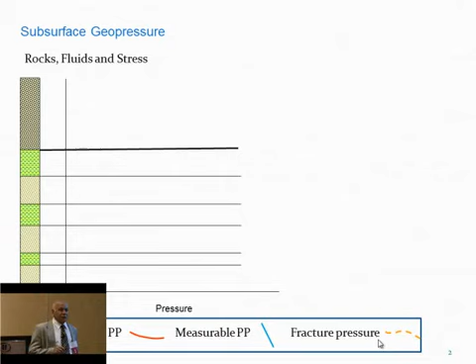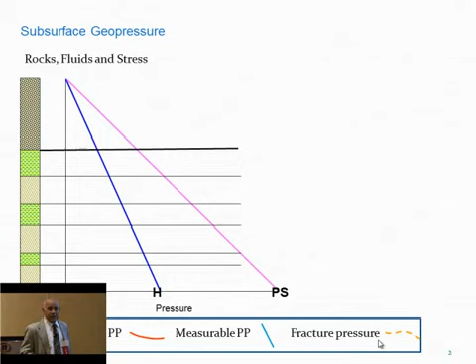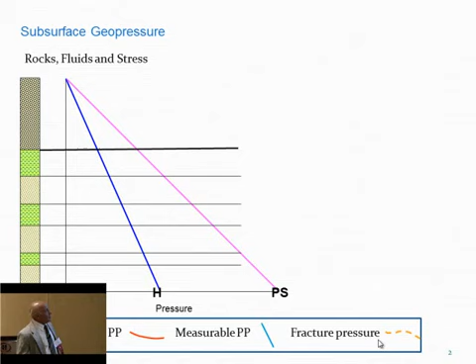Here is the lithology, the rocks - sand, shale, sand, shale. To build up the pore pressure in the subsurface, we need rocks, fluid, and stress. Here's the rocks, here's the fluids, the formation fluids, and here's the stress. The stress will build up the pore pressure in the subsurface, exactly like human beings - stress builds the blood pressure up. Between the hydrostatic and the principal stress is the pore pressure.

Any pore pressure profile should be displayed in two parts: the part predicted in the shale, and the part that's measurable - the one you can measure is in the sand. You see how the pore pressure profile progressed from top to bottom. If the pore pressure reaches a point where it exceeds the limit and starts fracking the formation, this is the frac pressure. So we have the lithology, hydrostatic, pore pressure in the shale, pore pressure in the sand, the frac pressure, and the principal stress. That's what you're going to see in the next 25 slides, so remember this term.

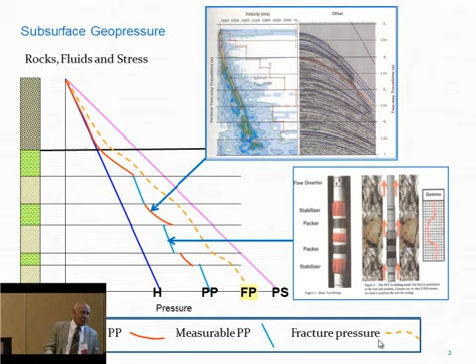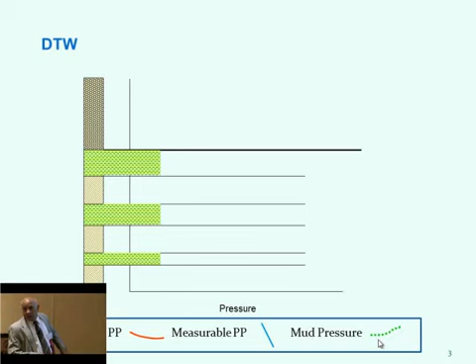Here is what I refer to as the drilling tolerance window - I'm going to call it the window from now because I can't say drilling tolerance window all the time. Here's the lithology, hydrostatic, pore pressure, frac pressure. This window between the pore pressure and the frac pressure is very important. This window dictates how deep you can go, what your mud program looks like, and how many casing points you need to drill to reach your objective.

So we use the mud to drill anywhere, right? The function of the mud, earlier we used to say, is just to remove the cutting and lubricate the drill bit. But the mud has a very essential function: to keep the sand bed from flowing into the borehole and to keep the shale bed from breaking out. What do you call it? The borehole integrity.

You cannot use mud weight very close to the frac pressure, and here comes the safety issue, the safety limits. So we're getting a little complicated here. You got the pore pressure, you got the frac pressure, you got the mud weight in between, and you have a safety limit. So it's getting a little bit complicated.

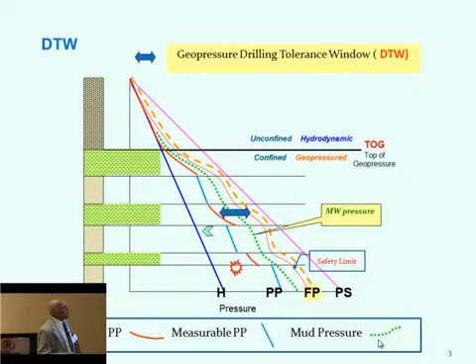We're taking the mud line 7,000 feet down, and let's see what happened to the principal stress. That principal stress, or the rocks, is going to move down 7,000 feet. Therefore, your principal stress moved 7,000 feet, your pore pressure moved down 7,000 feet, and of course the top of the geopressure, and your frac pressure follows suit.

Look at the difference between this window and this window. In the deep water, the window here is relatively narrow, maybe 30 or 40% narrower compared to the shallow water. Therefore, you need 3 casing points here to reach your objective at 20,000 feet, and here you need 4 casing points to reach your objective. That's the difference.

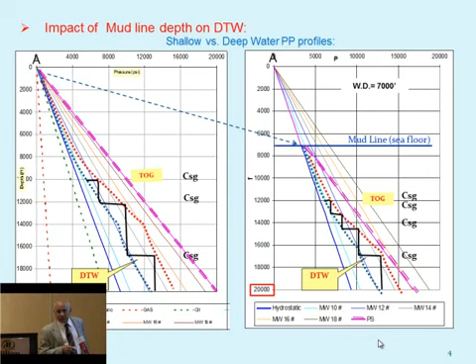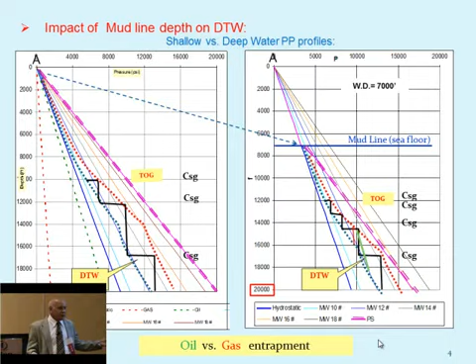Also, have you noticed nowadays in the deep water they found more oil than gas? All the new discoveries in the deep water, you see a lot of oil. The reason is, if you look at the gas and oil gradient here, and we superimpose that gradient on the deep water profile, you can see you can trap more oil than gas because the gas has a low gradient, because this is a narrow window here. If on the shelf, we can trap both of them without any problem.

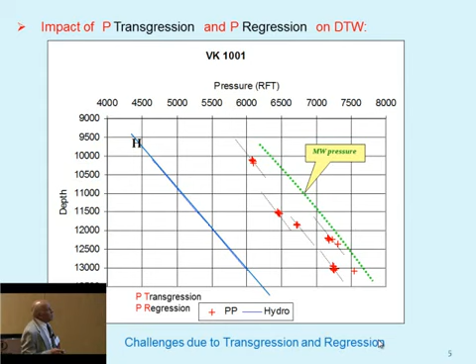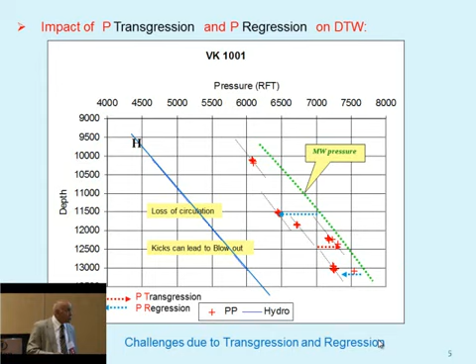What is the reason for that? A lot of people have a lot of guessing, or examples, here. The mud pressure here, we're going to assume this is the mud pressure to drill that well. When you have a transgression here, you might have a kick that can lead to a blowout. On the other hand, when you have a regression, you can lose circulation. This is one of the problems of transgression and regression, and transgression and regression are mainly due to structural impact.

This is a well that's been drilled in offshore Texas about 9 years ago. From the velocity, the seismic velocity, this is what the pore pressure looks like. And also from the seismic, we calculate the overburden, or the principal stress. In between, we have the frac pressure. We have the coefficient for it, and we did it.

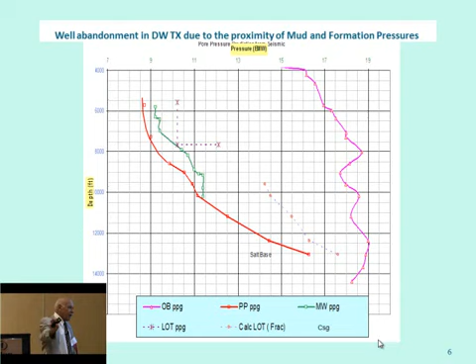So they drilled this well up to here. This is the mud weight. Here is 2 leak-off tests. The leak-off test means frac pressure; you measure the frac pressure in that formation. Based on the frac pressure up here, we calibrate the frac pressure way ahead of the drill bit. So the calibration was good.

So the mud weight is supposed to follow the pore pressure down there. But unfortunately, the tool pusher, and probably the people dictating how this is going to proceed to reach this point, the next casing point, let the mud weight go straight. It didn't change. It doesn't follow the pore pressure.

What happened? There's a very small streak of sand, about 10 feet, and the well started flowing. They killed the well, and the formation broke down. This is a cycle that's very common in the deep water.

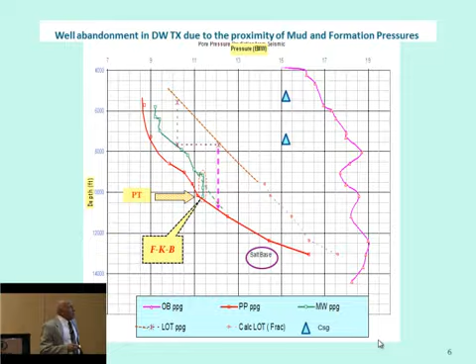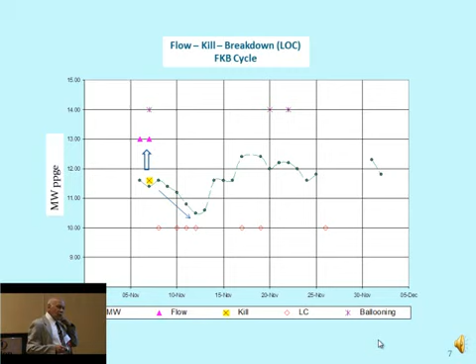Flow, kill, and break down. This cycle took about a month to try to heal or fix that well. It didn't work out because with the well flowing and you kill it, you start losing circulation from increasing the mud weight, so you reduce your mud weight, then go up again and try to drill, raising the mud weight. This is like an endless cycle. After a month, to pass just 5 feet of sand, the well was plugged and abandoned, not dry and abandoned.

Let's see how, if you have a discovery, a gas column or hydrocarbon column, this is going to impact your window.

This is Mississippi Canyon Block 296, south of the Macondo Prospect. Everybody can see? All right, look at that pore pressure profile here.

This is the mud weight, an indication of pore pressure. Here is the RFT, measured pore pressure. Here is the leak-off test. Look how narrow this window is. You cannot maneuver, it's pretty tight. It took about 7 casing points to drill 10,000 feet, so every 1,400 feet you're going to stop at a casing point because of that narrow window.

Let's take this piece and enlarge it. Here is your water-gas contact, here is a gas column, here is the mud, here is the leak-off test. That's the frac pressure, and that's the window. The window without the gas would extend up to here, but because of the gas column, your window shrunk. When the window shrank, the ability to maneuver with the mud weight became very restricted. So that's one of the problems.

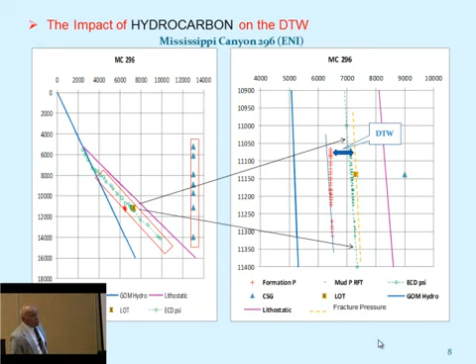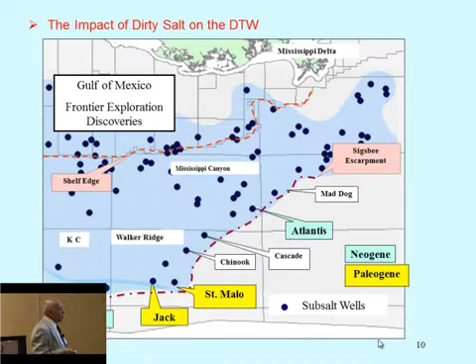Your principal stress is going to equal the tectonic force, so it's coming sideways, and your overburden becomes the minimum stress. So if you frac your pressure, or run a leak-off test, the frac pressure is going to be almost equivalent to the overburden. You see that a lot. Let me share some examples. Okay, here's the model, the geopressure model.

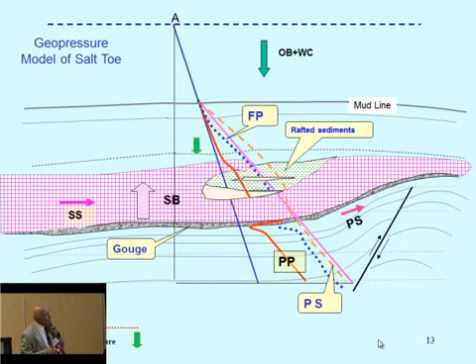There are two wells, one in St. Malo, and this is Jack 1 and Jack 2. This is St. Malo. They were drilled by Chevron.

Can you see? All right. Okay, I'm uncomfortable looking at it this way. I want to, huh? Can I come here? Sit down? Think so? All right, so here's two wells.

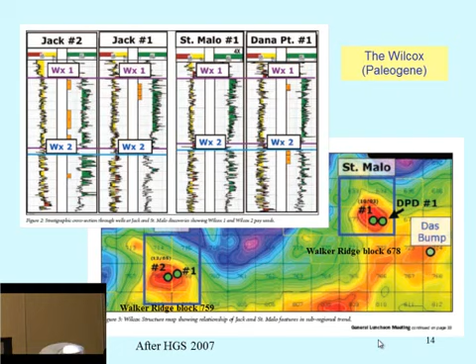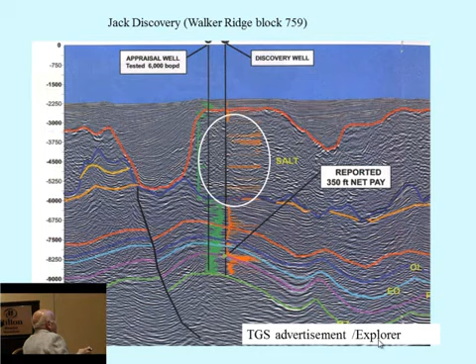One is Jack, one is St. Malo. And here's what that looks like on the seismic line. If you look at the seismic line here, you see a little bit of streaks. This is the overlay of the well log on the seismic here. Very high resistivity in some pockets here.

Okay, what happened to Jack? Mr. Jack here is the overburden. This is calculated from the weight of the sediment, just density, right? And I'm going to use the mud weight as a pore pressure indicator. Here it is. Then here's the leak-off tests.

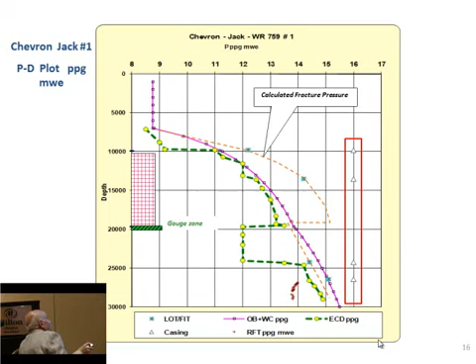You notice here when I said, okay, the frac pressure is almost or above the overburden. Here's the frac pressure outside the overburden, above the salt. Below the salt it comes back. Here's the calculated frac pressure, and look at this. Here's your pore pressure, or the mud you drill the well with. Here is the frac pressure. They meet at that point in the gouge zone where the salt plowed the sea floor.

And why is that? Because it was a dirty salt. The clean salt is supposed to have no pressure because it's solid. It doesn't have permeability, it doesn't have porosity, it doesn't have fluid. But here, you see the pore pressure increase. This is due to the inclusions of dirty salt.

Also, here are the RFTs, and this is a little bit of a calibration problem here. You see that? Turn it off. You see that RFT? Usually we have a problem when we convert RFT from PSI to PPG, giving you a reverse inclination or trend.

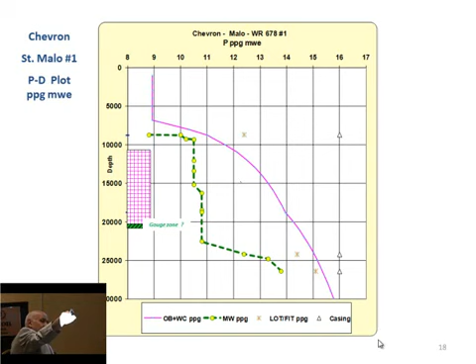On the other hand, next to Jack, about 10 miles away, there's St. Malo. Here is the overburden, here is the frac pressure, as usual. The frac pressure here is higher, below the salt is lower, and here is the mud weight, which I use as a pore pressure profile. Over here, went from the top of the salt to the bottom, through the gouge zone without a hitch. Went straight, no problem.

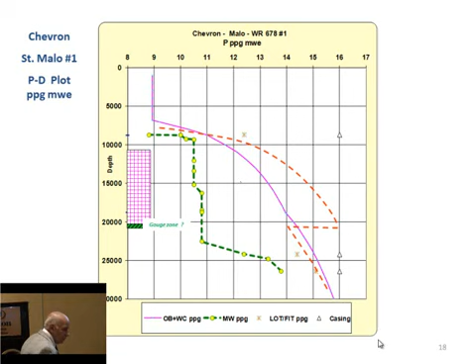Why? Because the window, the drilling window, was wide. I mean, the driller can play around, he can increase the mud, he can decrease the mud, there's no problem. Because it was clean salt, no salt inclusion, no rafting blocks. And need about 3 casing points to reach the objectives.

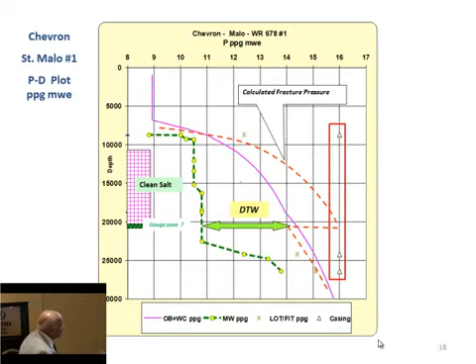So now we have two wells, Jack and St. Malo. One had a very, very narrow window, the other a wide window. The reason is this one was drilled in dirty salt, and this one was drilled in clean salt.

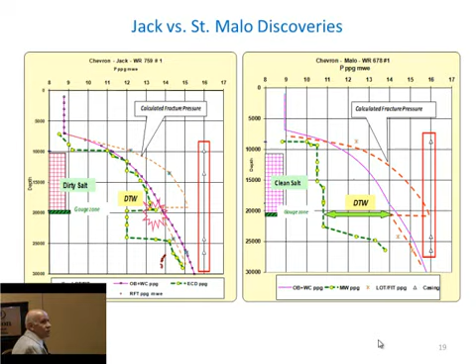We have another example also, repeating the same case, or the same thing. Atlantis, that was drilled about 12 years ago. Here's the overburden, calculated from the density log.

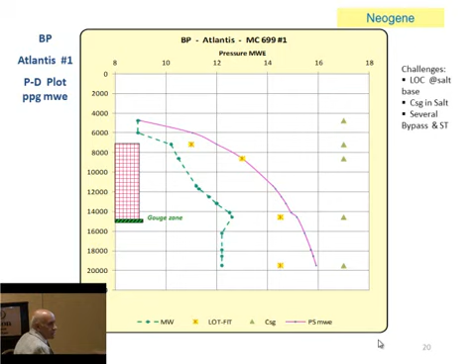Here is your mud pressure, representing the overburden and the pore pressure. You see here the pore pressure increased while drilling through the salt. You're not supposed to. They lost circulation in the salt, then they put casing in the salt. You're not supposed to case in the salt if you don't have any problem, right?

The frac pressure goes up above the overburden, then comes back in the gouge zone or the plow zone and becomes less than the overburden. Look at the drilling tolerance window, it's very narrow, and they suffer a lot of troubles, the flow, kill, and breakdown cycle I mentioned before, because it was a dirty salt. So the dirty salt applied to troublesome drilling. If you have a dirty salt, you get a lot of troubles.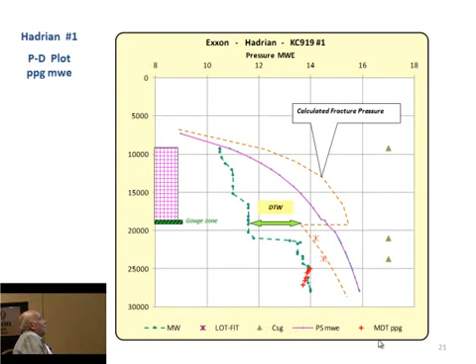Here is Exxon. About three months ago, they announced their discovery of Hadrian, Keathley Canyon 919 #1, and I plot everything here. This is the mud weight, representing pore pressure. Here is the frac pressure below the salt. We assume that frac pressure above the salt is going to be above the overburden, and below the salt is going to be less than the overburden. Look at that drilling tolerance window, nice, because this well has no trouble whatsoever.

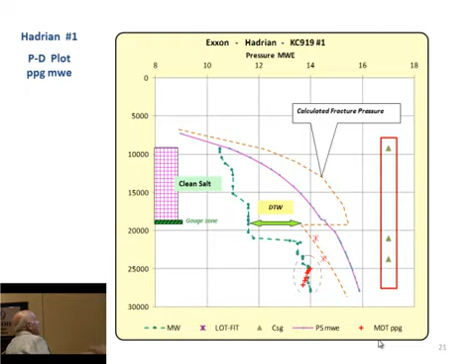And here's your RFTs with that reverse slope. By the way, we fixed that reverse slope. So here is your clean sand, clean salt, I'm sorry. Here's your Exxon discovery. So the correlation, even in the Pliocene and the Neogene, you will see the same thing. If you have a dirty salt, you will have trouble, especially in the gouge zone. If you have a clean salt, your drilling tolerance window is wide, and there's no problem whatsoever.

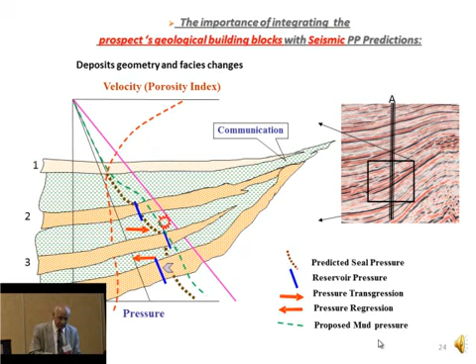All the geological work goes hand in hand with prospect generation. I mean, it has to be. It's not at the end, you know, 'hey, here's my velocity, give me the pore pressure.' You've got to incorporate geology with all disciplines to find your answer.

The most troublesome zone is the interface between the seal and the reservoir. You drill through the seal, even if the mud weight is less than the pore pressure in the shale, and you might have some trouble with the borehole widening, but it's not going to harm you. It's going to harm you when you step out of that shale into the sand.

So let's go to the conclusions. Is that enough or more? Okay, pore pressure is predicted in the seals and measurable in the sand. We know all of that, right? You can't predict the pore pressure with the velocity in the sand or the reservoirs.

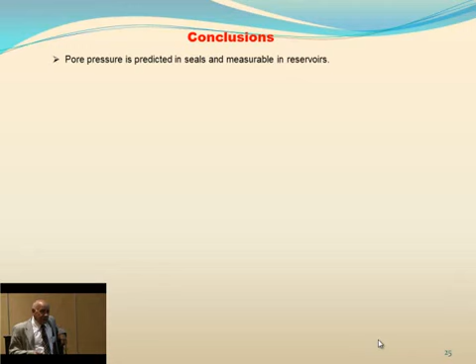Also, the drilling tolerance window dictates feasible prospect drilling programs. What is the factor that reduces the drilling tolerance window? Let's see what it is. Water depth. The larger the water depth, the narrower your window is.

That's why when we step from the shelf into the flexure trend, we didn't have those problems, because the water depth was 2,000 to 3,000 feet. When we go to 5,000 feet and higher, that drilling window becomes very narrow. Also, transgression and regression cause a lot of trouble, and we need to find out where transgression and regression are going to take place by going back to geology, geophysics, and pore pressure analysis.

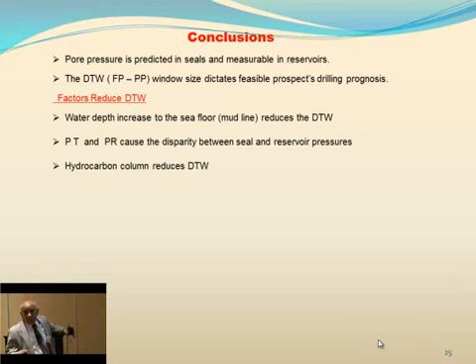Hydrocarbon column reduces that window. So if you're drilling a prospect and you tell your boss you got 300 feet of gas, you better be prepared for it when you drill that well, because that 300 feet of gas is going to reduce that window. And you're not drilling for a dry hole, you're drilling for oil and gas, right?

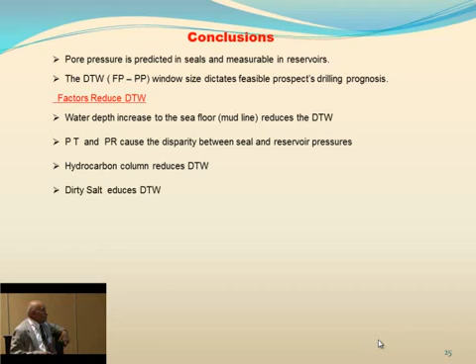Dirty salt always reduces the drilling window, always. The most troublesome spot along the borehole trajectory is the seal-reservoir interface. The seal is no problem. The reservoir is going to flow on you.

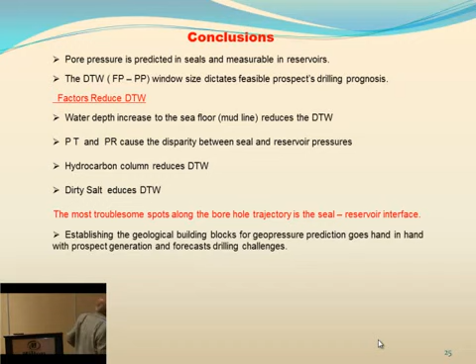Establishing geological building blocks for pore pressure prediction goes hand in hand with prospect generation and forecasting drilling challenges. Borehole instability, bypasses, sidetracks, flow-kill-breakdown cycles, partial blowouts, and failure to reach the prospective target are common in deep water due to the narrow drilling window.

Oil versus gas: we find a lot of oil in deep water because of the narrow window. So that narrow window plays like a double-edged sword, because it doesn't have enough sealing capacity to hold the gas, but it can hold the oil, because the gradient is different.

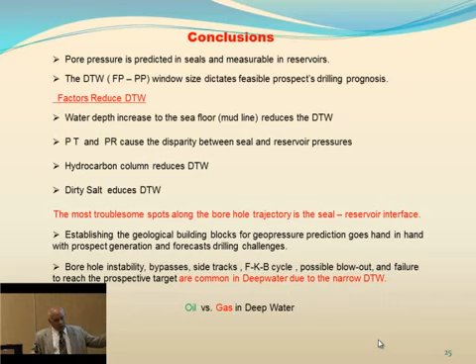Sand, no. It's a rafted block. Sediments come with the salt itself, like in the mud log. Can I go back? Sir, can I go back? Okay.

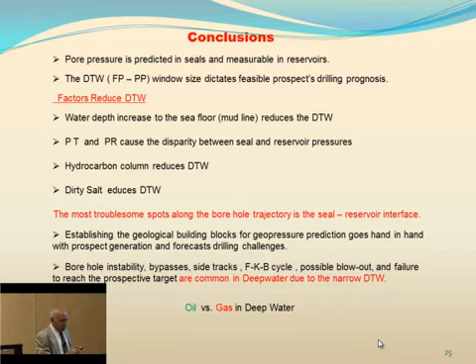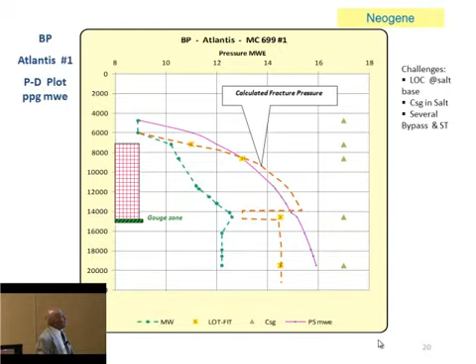In the mud log, you can see that it's like 20 feet, or let me see. You pass through one side. No, that's not a mud log. Right there, see, this zone here is about maybe 30, 40 feet of sediments within the salt itself.

It's like sandwiched in the salt. It's not embedded in, it's sandwiched. Big blocks, like 20 feet here, there's 10 feet here. And here is the gouge zone, no return. That's the only explanation from the mud log. You can't get any sample. You have to bypass quickly.

Yes sir, I hear some whisper here. Yes sir, can you explain how the pressure gradient can be higher than the overburden pressure? You know what, I wish I had that presentation in the back here, but I can explain it.

If you have sediments, salt and sediments, okay, the salt in between has less density, right? So the salt tries to float up. On top of the salt, or the sediments on top of the salt, you get two forces. One is the overburden, and the other is the buoyancy, or the salt buoyancy, right? So in this case, the overburden is the calculated overburden, okay. The density overburden is not the principal stress, because you have two stresses. One is the overburden, which we put in our calculation, and another force coming from below, which is the salt buoyancy. This is not calculated in the overburden.

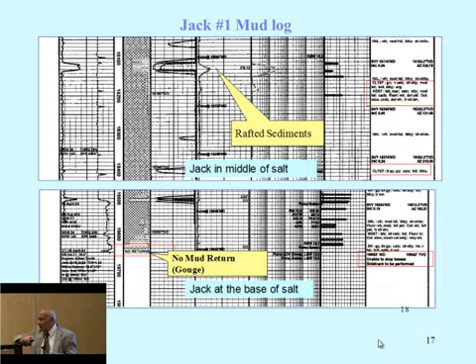You want me to go to the slide? I see you shaking your head. You want to go to the slide or not? Okay, here it is. All right, now.

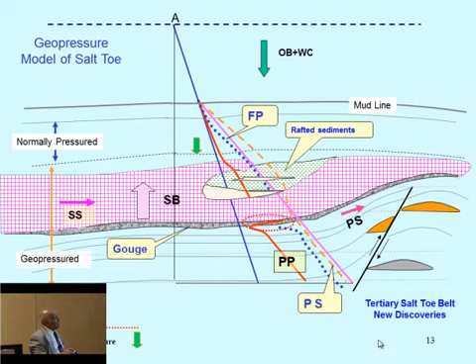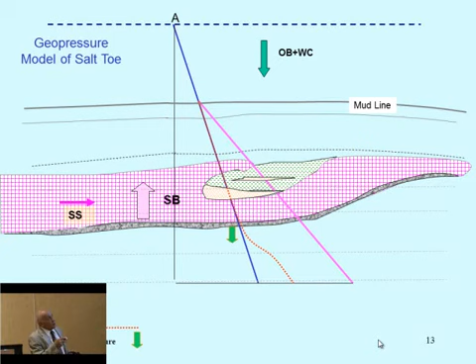All right, here we put the salt, inject the salt in the formations. Okay, here is the salt buoyancy, right? Here is the principal stress, because the principal changes. It's not the weight of the sediments that's the principal stress anymore. You agree? So by principal stress you mean the maximum? The maximum stress, see, the maximum stress is sideways down because it does buckle or lift the sediments up. So this one, or the overburden, becomes probably the minimum stress, and this is the principal stress.

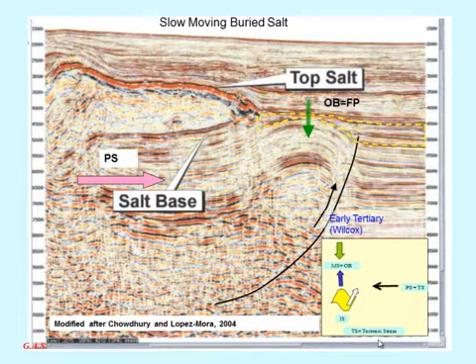So the salt buoyancy and the overburden, they act against each other, or they add to each other, to squeeze the sediments harder and faster. That's why if you have a normal compaction trend, the slope is going to be a little bit steep.

I don't understand that, because the mud line is free to move upward, there's nothing constraining it. No, I'm talking about the sediments, not the mud line, sir. But the whole sediment column, you have two forces, salt in the sediment column will be moving up. So the buoyancy of the salt doesn't count because there's a free surface at the mud line, so the whole...

Yeah, but you have two forces, the buoyancy here. Do you agree this is 2.2 specific gravity? Here is 2.2, here is 2.1 or 1.2, 1.9, right? So this tries to escape, tries to go up. That's right, all of the salt tries to go up. So you have two forces, the buoyancy of the salt and the weight of the sediments. So in this section, from this point down to this point, you have two forces, it's not just one, it's not just the overburden.

I think we might leave... We can, no, you can, I mean, I've got all the time you want, I've got a display there if you want to look at it. Actually, some of these can be discussed offline. That's right. Are there any general... Offline, offline, that's a good idea.